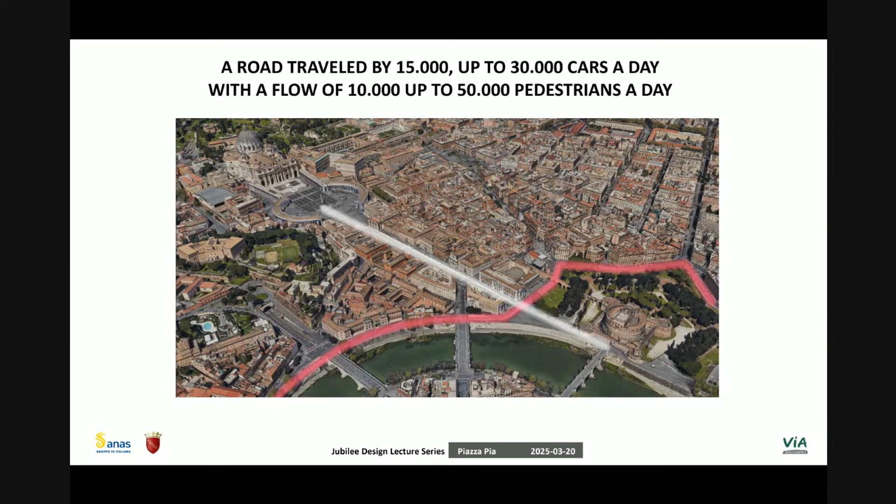But we came with another proposal. The proposal was to cover the tunnel, creating a continuous pedestrian area. Our proposal was enthusiastically adopted by the mayor of Rome and created a completely new perspective.

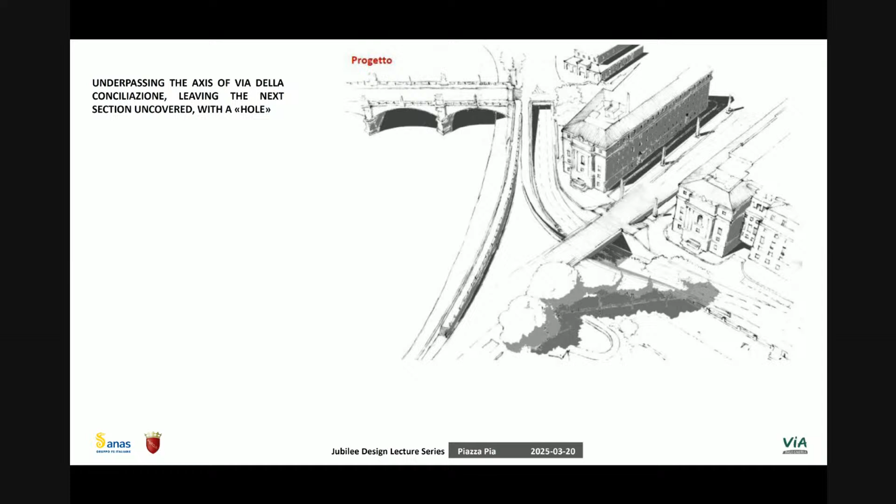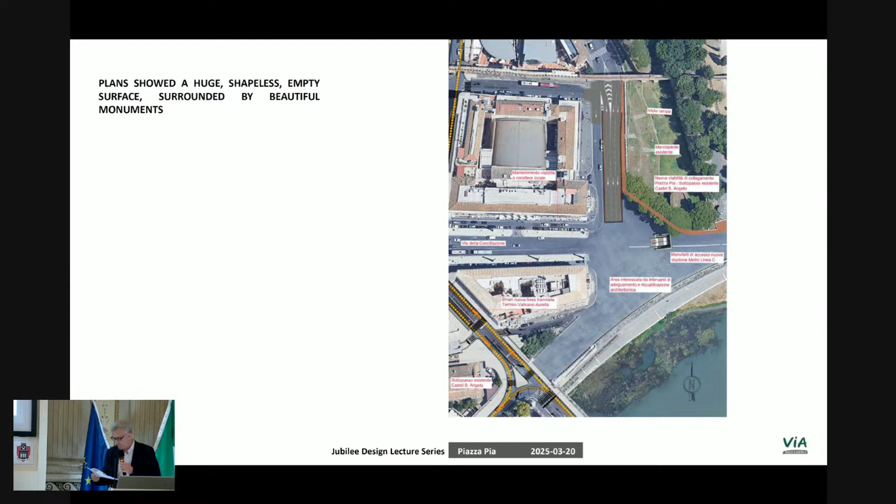We had now a huge, shapeless, empty surface surrounded by beautiful monuments. You can see it in the picture. Around this, we had the Tiber walls, the Emperor's Mole Adriana, renovated in the 14th and 15th century by an architect called Sangallo and transformed into Castel Sant'Angelo.

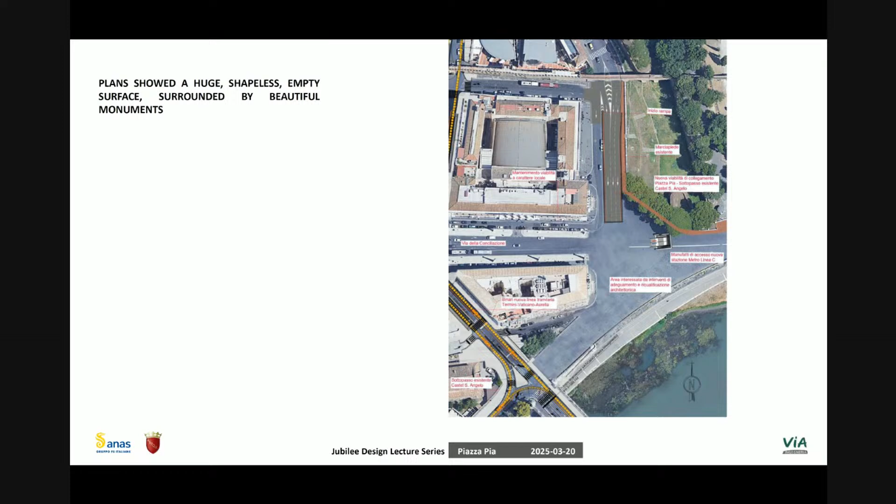This is the Mole Adriana, this one. You can see underneath you have the Mole, and on the upper part you have the castle. And the buildings in front of the square had been built in 1929.

What happened is that no one had faced the issue of how to arrange this huge surface yet. Initially, we were told by the authorities that they were thinking of a separate assignment to design the square — two projects, two teams. We didn't agree. So we made the point that the project should be looked at and considered as a whole from one single perspective, and that we should be the ones to design it in its entirety, by the same team.

Via Ingegneria started 40 years ago with a focus on transportation infrastructure, but just by doing that, we organically developed a strong expertise in architecture. So I go back to my initial point, which is the critical issue in our line of business: the integration of disciplines. We believe that the need for integration is proportional to the complexity of the project.

And particularly this project was probably the most complex we had ever faced. The architectural design, in this case more than in others, was strictly connected with all the other strategical issues: the hydraulic underground issue, the archaeological issue — you may see what we found during construction.

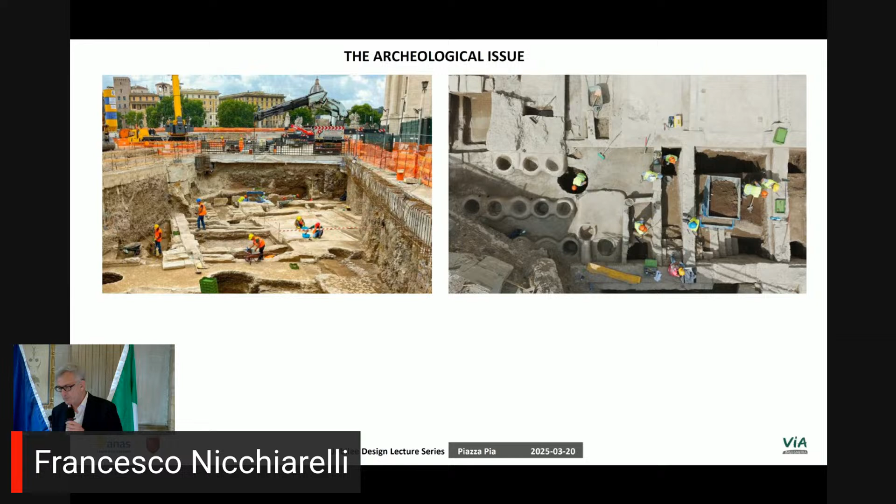One of our partners, who's going to talk to you soon, is an excellent architect, and he has an amazing team of over 20 people in our company. Now Matteo Di Girolamo will tell you the rest of the story from his engineering perspective, followed by Felipe Rozzano, the architect, who will tell you his side of the story — probably the one you want to listen to more.

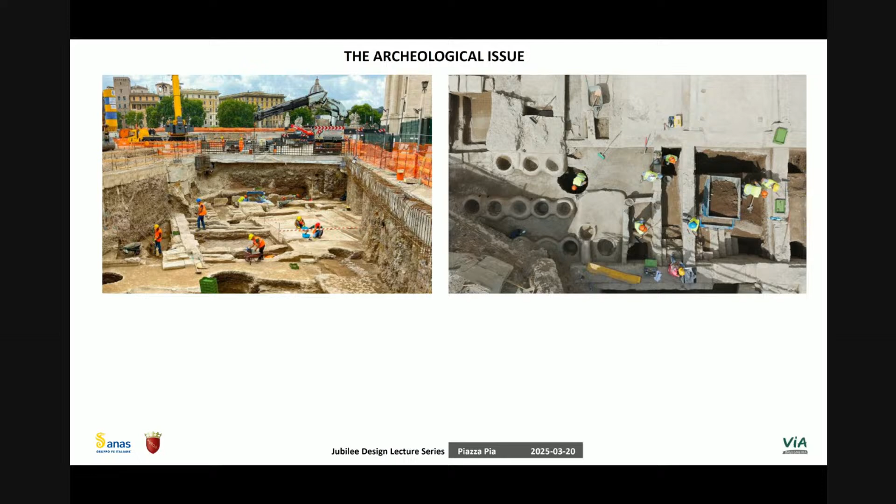Good morning, morning to everybody. I'm going to start the most boring part of the intervention. I'm sorry, because I'm an engineer, and so I think you are not so much interested in this kind of problem, but I think maybe you are.

I think it's important to understand the relation between what you can see and what you cannot see. Just to give you some data, some facts: the cost of all the intervention was about 55 million euros. The cost of what you see, the cost of the square, is about 5 million euros, or something like 7 million euros. Everything else is just down the road, underground.

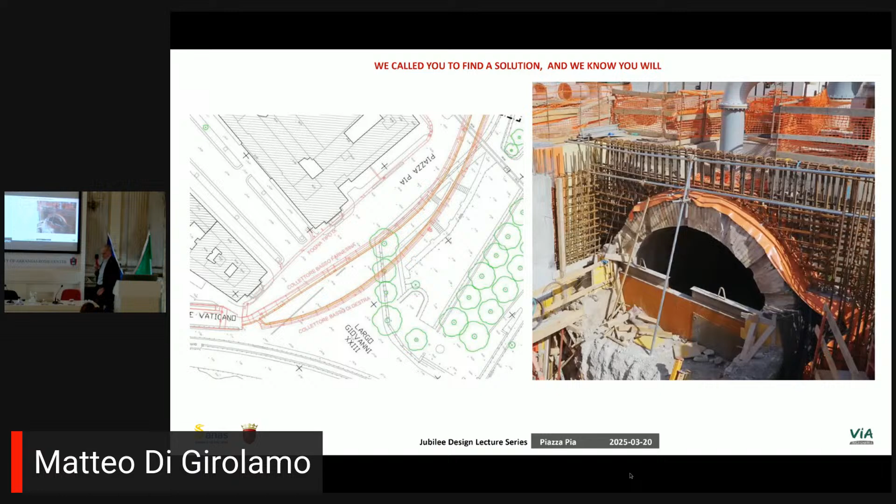So this is just to understand what kind of problem you have to face when you have a project like this. I would like to explain in a few words what kind of problems arose. When I was first invited by the Rome municipality and asked to assess the feasibility of the intervention, I welcomed this request because I still didn't know what I would be facing.

After about 1 or 2 months spent studying the papers on the underground presences, I made a discovery I would never have desired to make. Under the road there were flowing the 2 largest sewer collectors in the city of Rome. These collectors collect all the stormwater of the city, with a catchment area of about 800,000 inhabitants. All the water from the north part of Rome passes through this place, so it's impossible to interrupt the service even for 1 minute.

On the basis of this discovery, I went back to the municipality, quite happy, and said: okay, the project is not feasible. The reason why previously the underpass was stopped before crossing Via della Conciliazione in 1998 was exactly this - the project was not feasible. But the answer from the municipality was: we called you because we think you will find a solution, and you have to find it. No way, you have to find it.

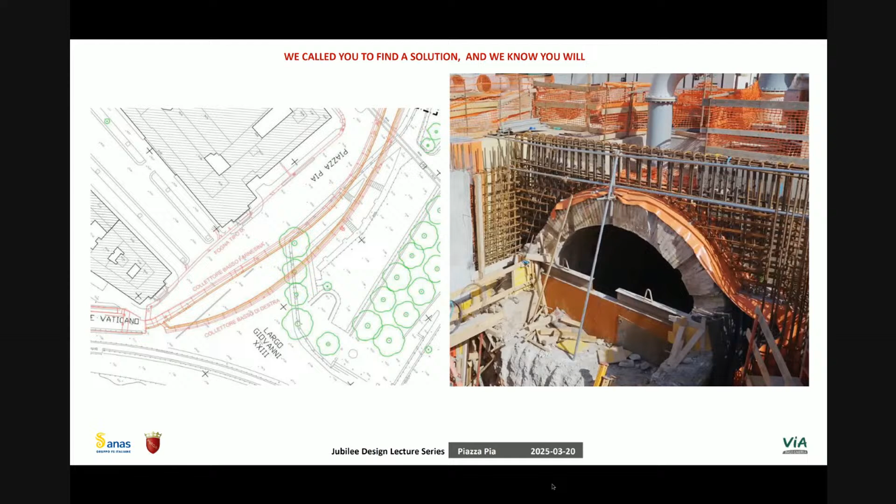So in these cases - and you are all very young, so you will have a very long professional life and face a lot of very difficult situations - sometimes, not often but sometimes, you think: how can I do this? I have to do it, but I don't know how, yet I have to do it. So I kept thinking and thinking, and I started to think of an idea that seemed a little bit insane, but perhaps also the only one possible.

I thought, maybe I don't know why no one thought about this, but anyway I can try. These are the 2 collectors - just to understand the proportions, this is a person. The collector is more or less 4.5 meters high, 3 meters wide. So if I use one of the 2 collectors to carry all the flow, using the second collector, I could demolish one of them at a time and build a third, larger one to collect the flow from both.

The doubt was: will one collector be able to carry the flow rate of both without going into crisis? At this point I started rather complex calculations to see if, during the duration of the construction, this was acceptable, and what risks were involved in making this choice. Of course you understand there is no chance to fail. So the idea could work.

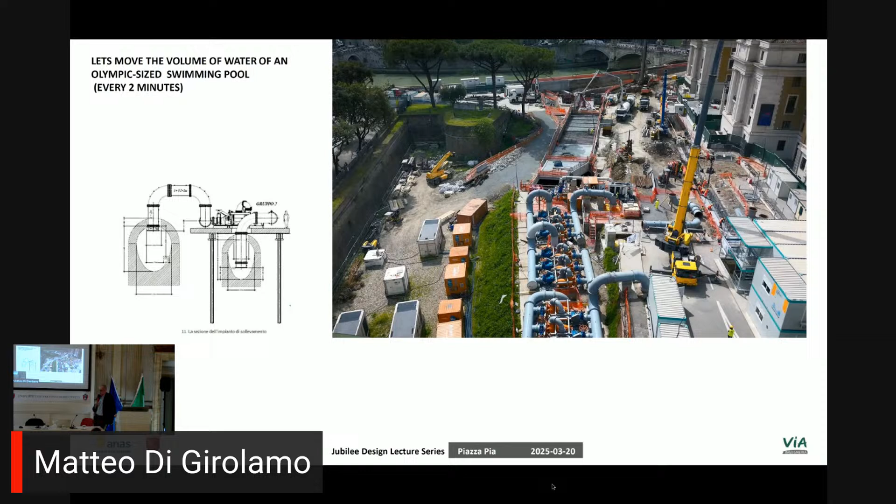The idea was that, at the time, no one was able to assemble such a temporary system, so it was necessary to arrange and deliver pumps from all over Europe. For every pump like this that you see, there were 10 pumps like this, and in Italy there were maybe only 1 or 2 available. So we collected pumps from all over Europe, assembled them together, and delivered them with something like 25 trucks from all parts of Europe, and we started assembling. Here you can see part of the plant, almost assembled.

And then we started to test if it worked, because we thought it would work, but we weren't sure. Once this task was completed, the more complex work was completed too, and we could move to the construction of the underpass and the square.

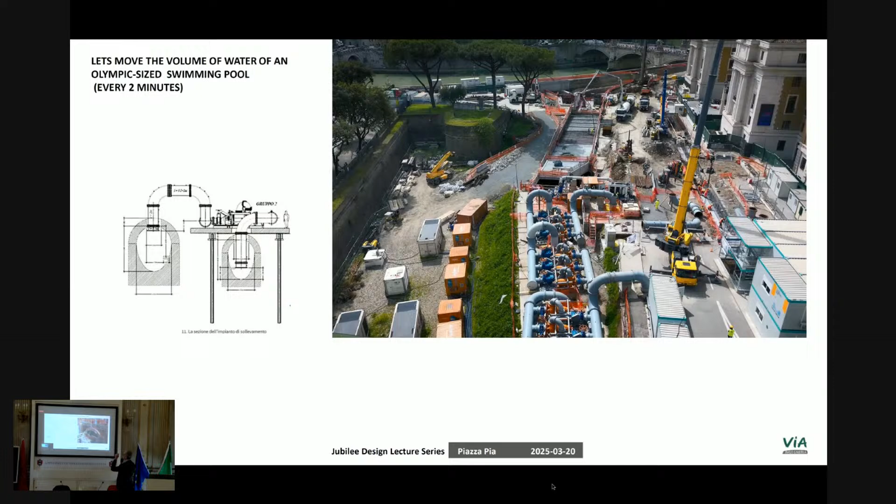Here you can see the new collectors, and you can also understand the size. The new collector is something like 8 meters wide, 5.8 meters. And here is where we are, just aside the wall and just in front of Castel Sant'Angelo.

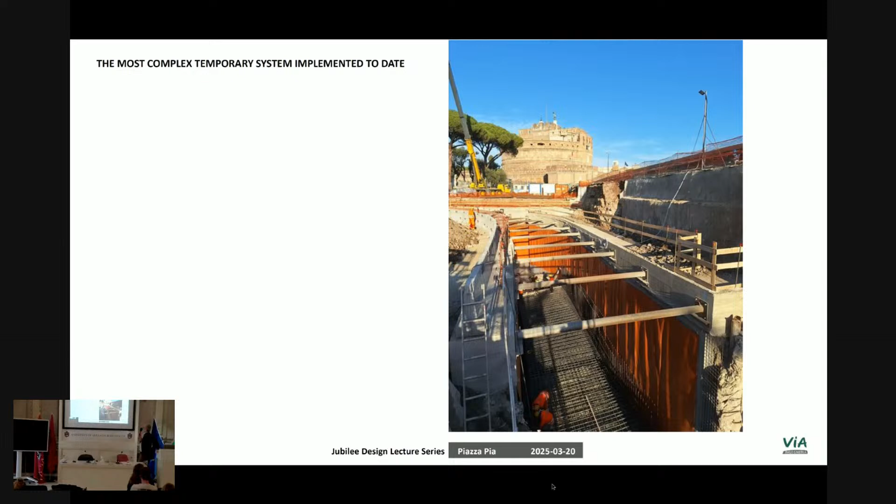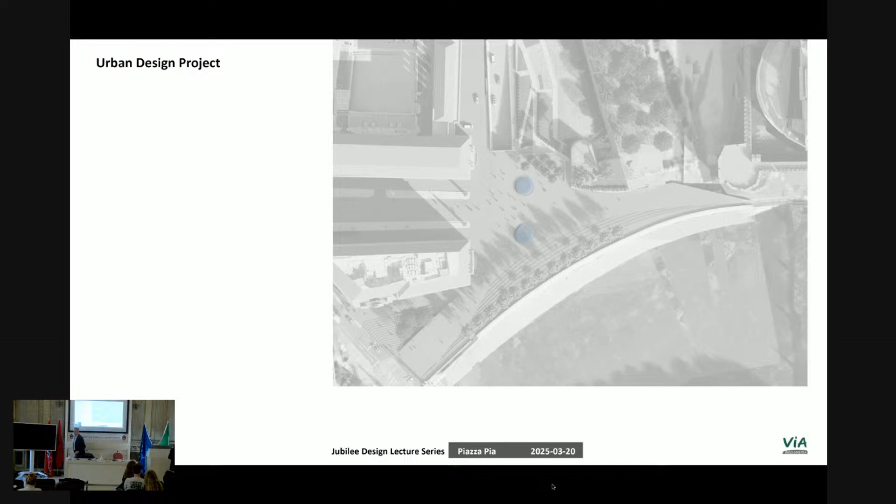Thank you for attending this lecture. Okay. Let me see if I know how this works. Okay.

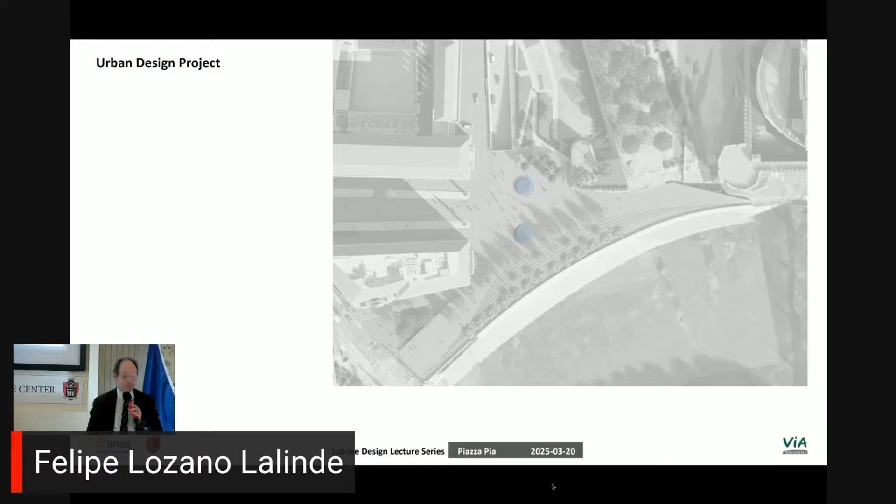Okay, I get it. Again, thank you very much for attending the lecture, and I'm very pleased to share this extraordinary experience we all share. My name is Felipe Lozano. I'm an architect at our engineering and architectural firm. I've worked since the beginning of the 2000s with my colleagues. First of all, I want to apologize for my English, because it's been many years since I've spoken it, so I will try to make my best.

It's important to say that for all of us, working and living in Rome, it has been an extraordinary chance to be involved in this project, and at the same time a great responsibility, because it's needless to say how important the area is historically and architecturally, and also because it's one of the most frequented areas of the city. There is almost no visitor who comes to Rome that does not pass through this area.

So our task was somehow complicated because we had a very short amount of time to deal with the project, since everything happened quite quickly. There was a timeline with a deadline at the end of 2024, because, as you know, on the 24th of December 2024 the Jubilee year began, and by that date everything had to be completed. So that was quite a challenge.

I would also like, as a kind of premise, to underline the importance of having worked in a multidisciplinary team. I really believe that, at least for me as an architect, working with my colleagues - engineers, structural, hydraulic, and so forth - was an opportunity to face the different issues during the design stage in order to find solutions in a more integrated way. This is the kind of approach we try to implement in all our designs.

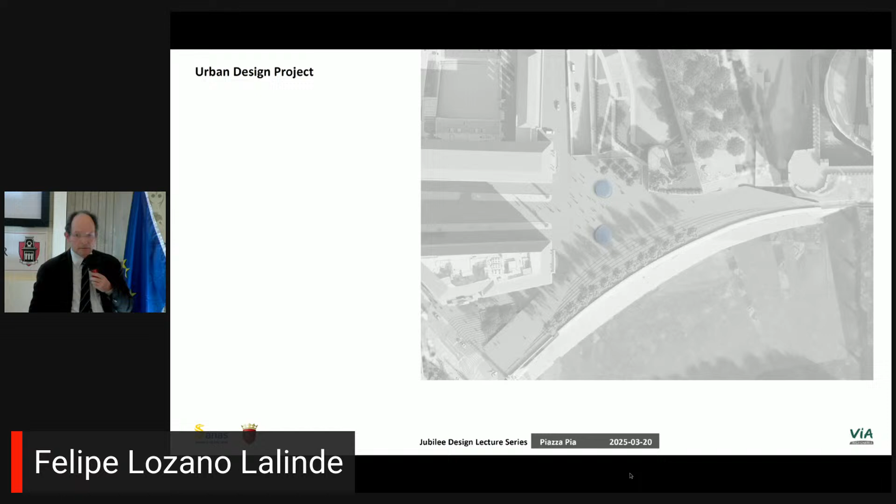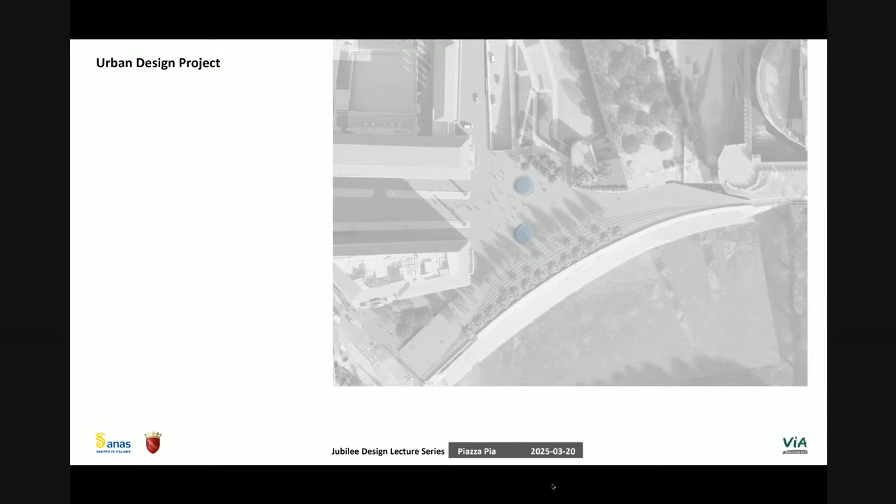After this introduction, I'm going to talk about the urban design issues. It's necessary, in my opinion, to give some idea about the urban development - how the city has grown, and the changes this part of the city has undergone over the centuries. Independently from our project, I think the changes this part of the city has suffered is a very interesting theme to study. I'll try to give you some idea, but shortly, because it's late.

This is how the square, Piazza Pia, was presenting previously to the new project. You can see the entrance to the tunnel that was built in the late 90s, and the two buildings at the beginning of Via della Conciliazione that, as I will explain later, were built in the 50s - so actually relatively modern buildings compared with Hadrian's Mausoleum, which is here in the bottom part of the picture. And you see the traffic junction.

Another interesting element, as I will explain later, is the retaining wall you can see there, creating a cut between the surface of the square and the river, and the sidewalk that runs close to the river wall. But we will talk about that later.

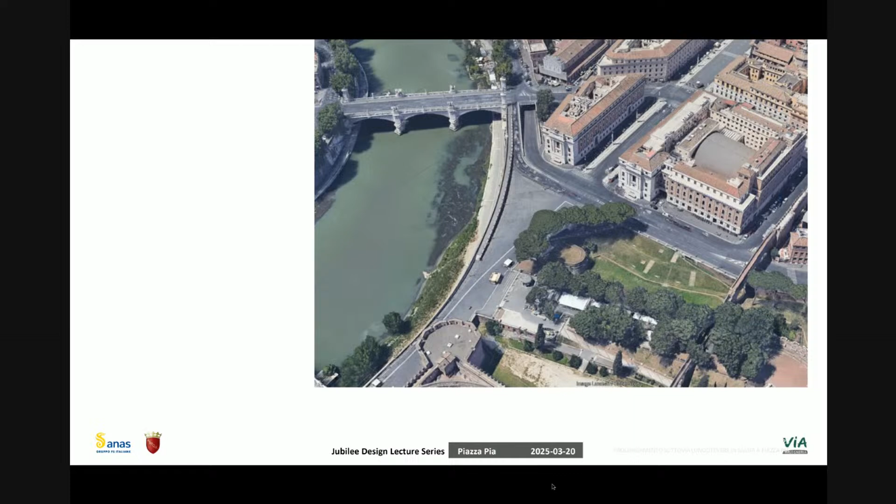It has been represented later, but there is a very beautiful ancient Rome map called Forma Urbis that you can see. It's in the Celio, but it does not reach this part, so it's hypothetical how the city was in Roman times.

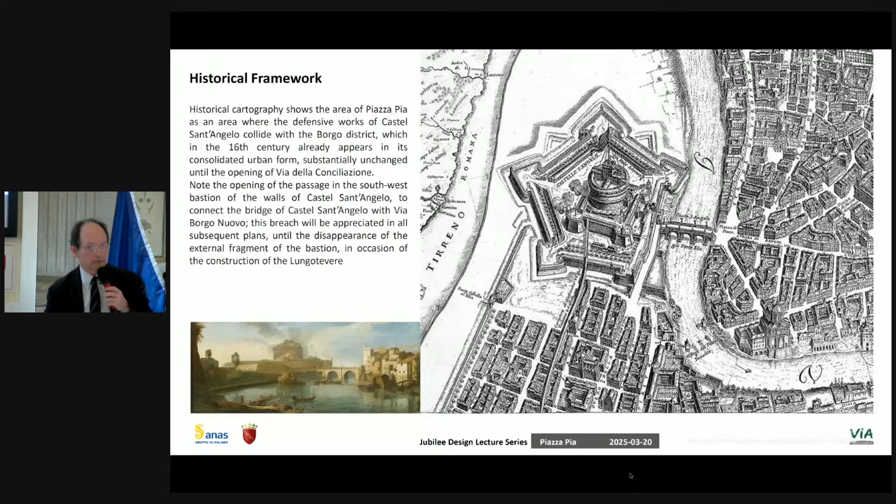Instead, since the 16th century, many designers and architects have portrayed the city, so we can see how this area was at that time. What we can say is that part of the area had an urban fabric that was consolidated since the 16th and 17th century.

And there was a very important plot in this part, which is the pilgrims' pathway. As you know, there is a sign here. This is Ponte Sant'Angelo Bridge, that links this part.

It was the bridge that, since the first Jubilee year at the beginning of the 14th century, when it was first held in Rome by Pope Boniface VIII, was used for pilgrims to cross the river, then turning west, going to St. Peter's Basilica. This is a very historical, consolidated pathway that has remained almost unchanged until the end of the 19th century.

One of the main aims from the urban design point of view was to reestablish that urban hierarchy that has been somehow compromised during the 20th century, mainly because of the increasing pressure of road traffic.

So here, there are two elements that I think are fundamental in order to understand our job: the urban fabric on one hand, and the Tiber River on the other hand. This is why I have inserted this image.

This is a very beautiful picture by Gaspar van Wittel, who was a painter in the late 17th century and early 18th century. He has made many views of Rome, which are extremely useful for us who work in the city of Rome, in order to understand how it was centuries ago.

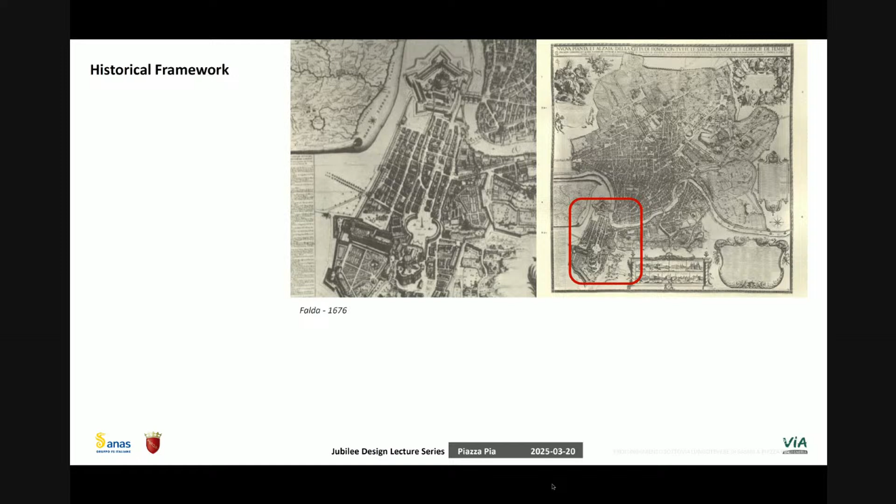It conditioned the bastions of Castel Sant'Angelo that were built earlier in the 16th century. As you see, this five-point star of the second line of bastions, this particular one was cut in order to allow pilgrims to move from the bridge towards St. Peter.

This is another view, quite interesting in my opinion, in which you can see from east towards west and towards St. Peter, how the area was. We are not talking about the central part of the area; this area actually was in the fringe.

Behind Castel Sant'Angelo, there were fields. It was not built up; it was built just at the end of the 19th century, to give you an idea.

Here you can see, as I was saying, the main path was through this road, called Via di Borgo Nuovo. From there were two other roads, Via di Borgo Vecchio and Via di Borgo di Santo Spirito. It's interesting to see these roads, because they no longer exist, as maybe you already know if you have walked around the area or read something, because they were completely knocked down at the beginning of the 20th century.

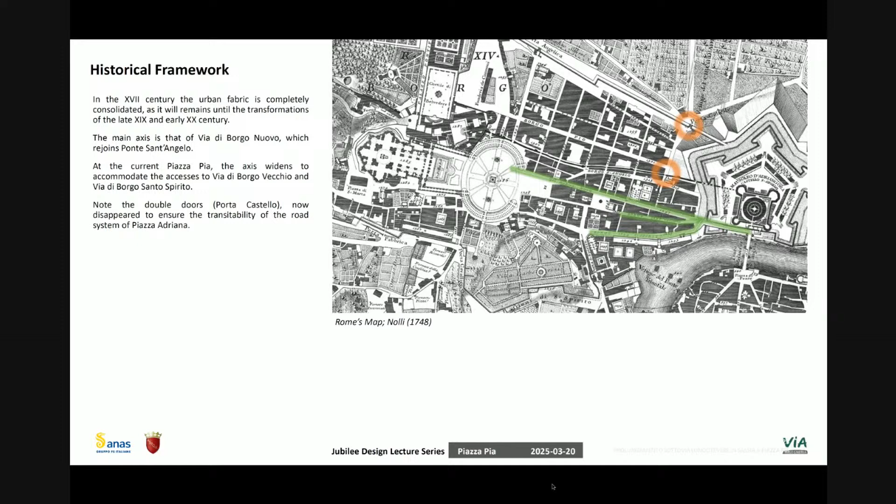So everything was more or less consolidated until the turn of the century, between the 19th and 20th century, when dramatic changes happened in Rome as it became capital city of the Italian state. You know that until 1870, Rome remained under the rule of the church, nevertheless the Italian state had already been established in 1861.

Rome remained under the rule of the church until 1870, when it was taken by Italian troops and became the capital city. So major urban refurbishment works were undertaken in order to modernize the city, which until that time had remained almost an anti-modern city, one of the few in Europe that had remained so.

Take into account that Rome, being a big city, is one of the few capital cities that still have the defensive walls that in the meantime in other cities such as Vienna or Paris had been completely knocked down in order to enlarge the city. But that was not the political program of the church ruling the city.

This changed after 1870. Major works were conveyed. One of them had to do with changing the shape of the river, also for sanitary and hydraulical reasons. The Tiber was quite a changing-in-level river, so it produced many floods in the city center. So major works of creating retaining walls were done.

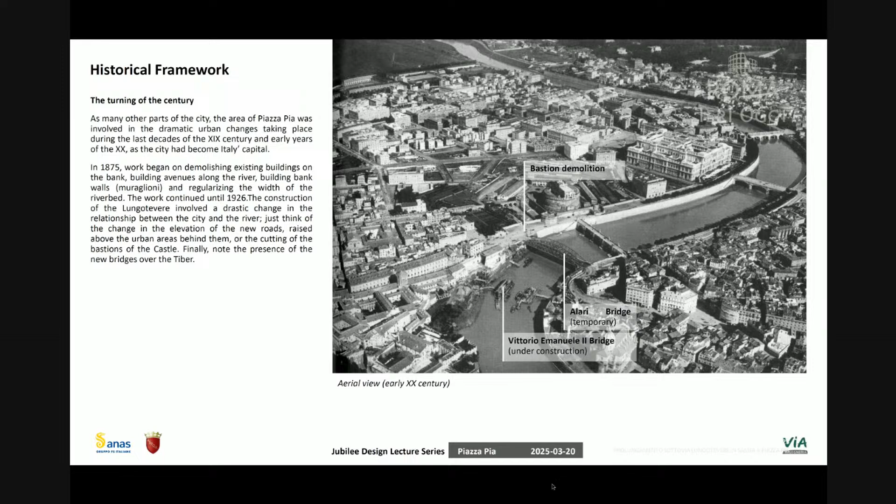For example, part of the bastions of Castel Sant'Angelo were knocked down. Just to give you an idea of the situation, how the place in which we are called to work has suffered many changes in the course of centuries, and in our opinion it is fundamental to acknowledge that progressive change.

This is, for example, a couple of images of the works of the new walls of the River Tevere that were built since 1875. It was one of the first works carried out in Rome as capital city. They are important because from an engineering point of view, we have had some interferences with these walls, as my colleagues engineers know.

This is interesting as well because these are images of the 20s. As you can see, other transformations that were even funny, from a certain point of view. These are the moat of the external defensive walls of Castel Sant'Angelo.

If you see the two images, which one would you think is the older one, the one on the left or the one on the right? In the left you don't see the moat, in the right you see it. Curiously, the older one is this one, because at a certain point the moat had been filled in. There was no need for that element.

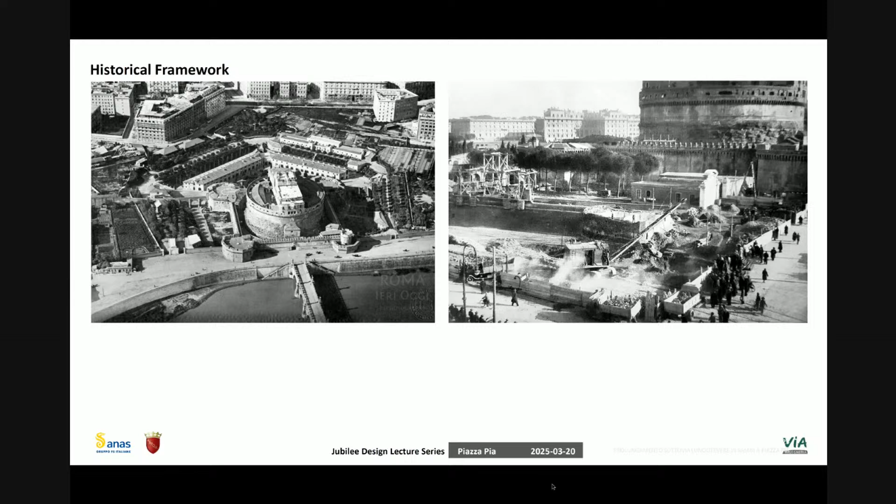It's important to say that the architect in charge of this design was Attilio Spaccarelli, one of the two architects that later had to do with one of the major interventions, the major project that is fundamental to understand how the area looks today. This is Via della Conciliazione.

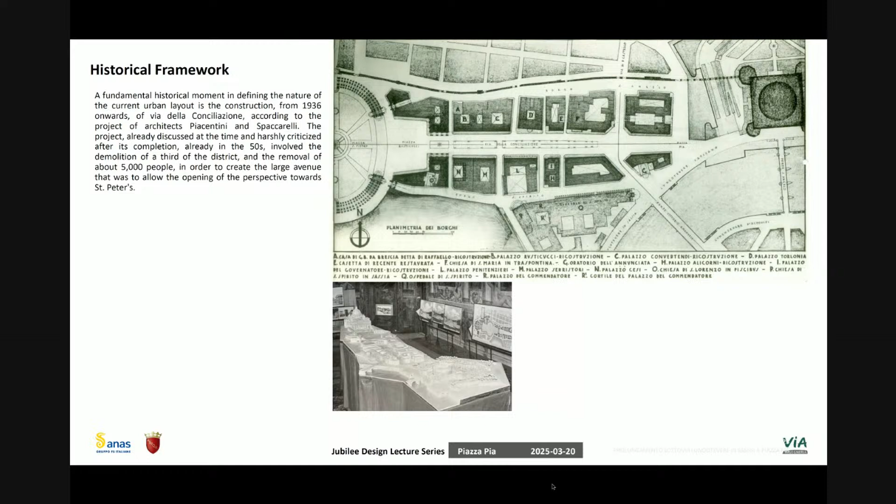Via della Conciliazione is an extremely interesting project in my point of view. It's as interesting as it has been criticized. It's hard to say whether it's a good or bad urban project. Maybe on the other hand, it's useless to give an opinion.

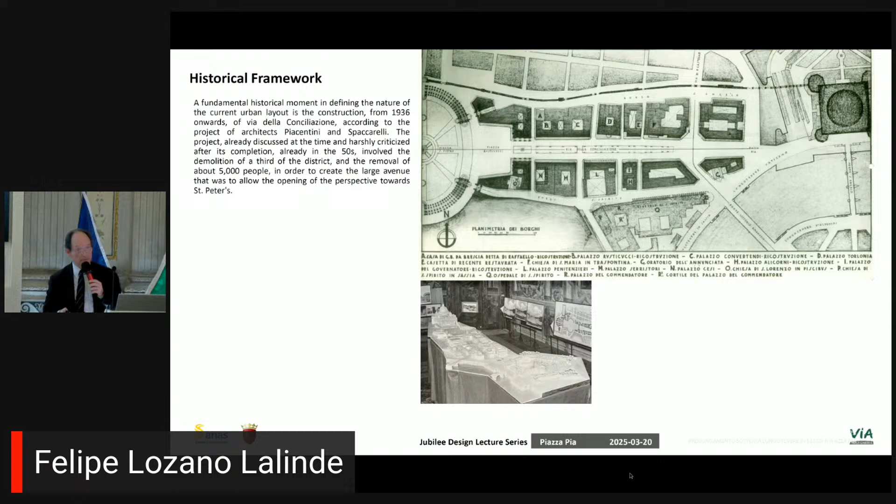This project was approved by Mussolini, designed by architects Spaccarelli and Piacentini. Marcello Piacentini, if you do not know him, was one of the most important architects of fascism, of the fascist era. He has built dozens of buildings throughout all Italy.

In this case, he made this intervention, taking into account that in order to create this new avenue, Via della Conciliazione — the Conciliation Avenue, maybe — the name is not casual. It tends to underline the agreement between the Italian state and the church signed in 1929. Until that time, after 1870, the relationship between the church and the Italian state had not been so great, as you can imagine. This changed in 1929, and this road had somehow to celebrate this new agreement.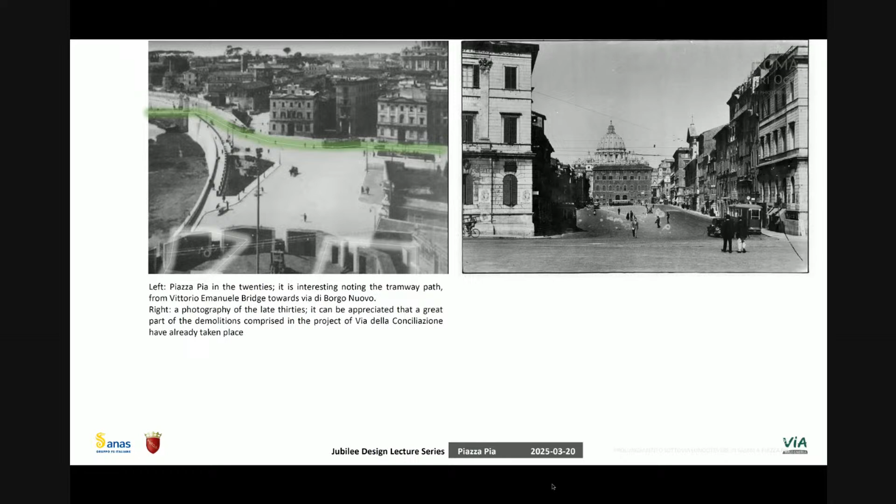So, well, I've made this historical background, which maybe became broader than I wanted, but I think it was useful. Now let's talk about the project. For sure, the project had a main aim, which was to pedestrianize the central area, eliminating the traffic junction, in order to foster the pedestrian flow towards St. Peter's.

But on the other hand, since the first moment, we thought that just pedestrianizing the area through the extension of the existing road gallery was not enough to obtain an urban space with enough quality. So we made an analysis of what other deficiencies the area presented to this date.

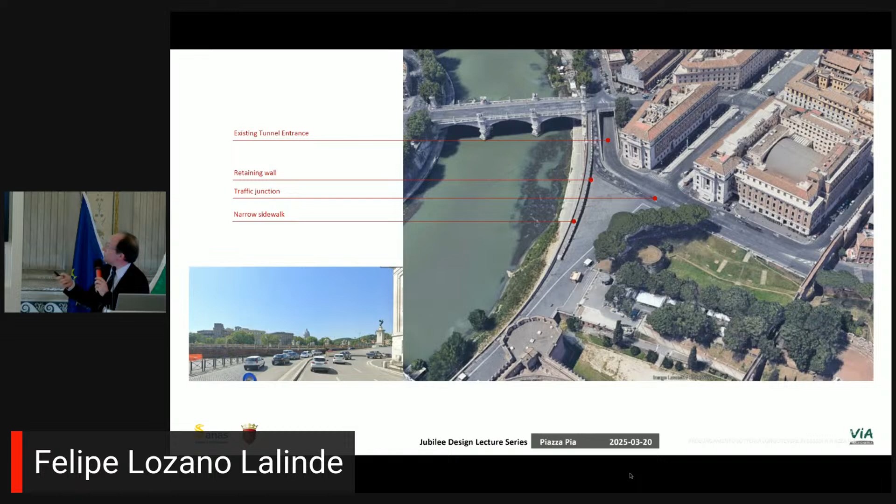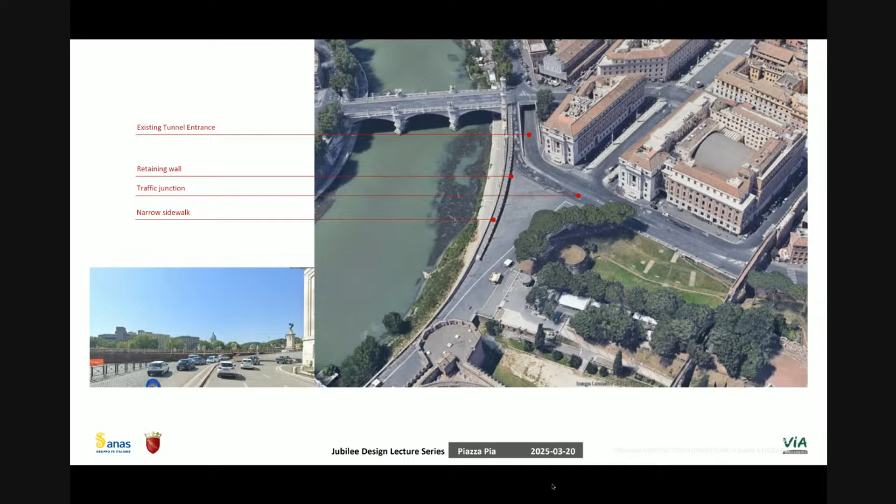For example, a thing we thought could be improved was the relationship between the area and the river. This relationship was almost neglected in the previous state. As you can see in this picture, there was a retaining wall that separated the sidewalk close to the Tiber wall from the rest of the square. So once you were descending from Castel Sant'Angelo to the central area, the river tended to fade, and you were not able to reach it again—there were two completely separated entities.

So we thought that had to be improved, and that became maybe one of the main elements in defining the urban design project. Of course, another element that could be rejoined was the piazza, the central core of the square, with the gardens in the old moat of Sant'Angelo. In this case too, staying here, you were not able to go to this green area. So this area was almost abandoned, which was a pity, because it's quite interesting. We thought this relationship had to be strengthened.

Finally, there was this area that had to be completely rethought, because it was previously occupied by the entrance of the old gallery. So there was a new surface that had to be designed. It cannot be seen in this picture, but I'll show you later—there is a small church, quite interesting, even if it's a fake, in the sense that it's an 18th century church, extremely interesting, but not placed in its original location. Actually, the church had been demolished and rebuilt during the works of Via della Conciliazione, because at that time they had no problem doing this kind of thing—they talk about moving palaces. Of course, they were not moving anything.

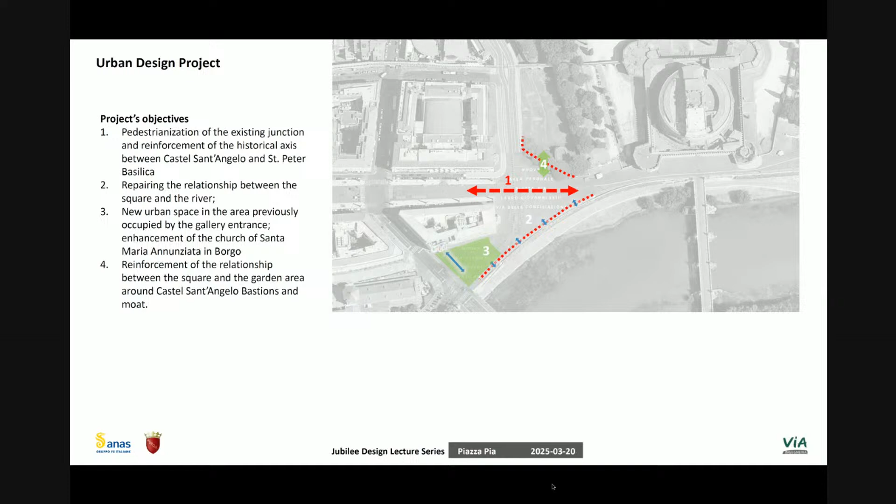This object—so we focus on how to achieve these objectives. Here you can see an image of the preliminary design that shows how we try to accomplish those objectives.

In the case of the relationship with the river, we thought that the retaining wall had to be completely rethought. And we substitute the wall with a gentle slope built as a series of steps in a very typical Roman tradition.

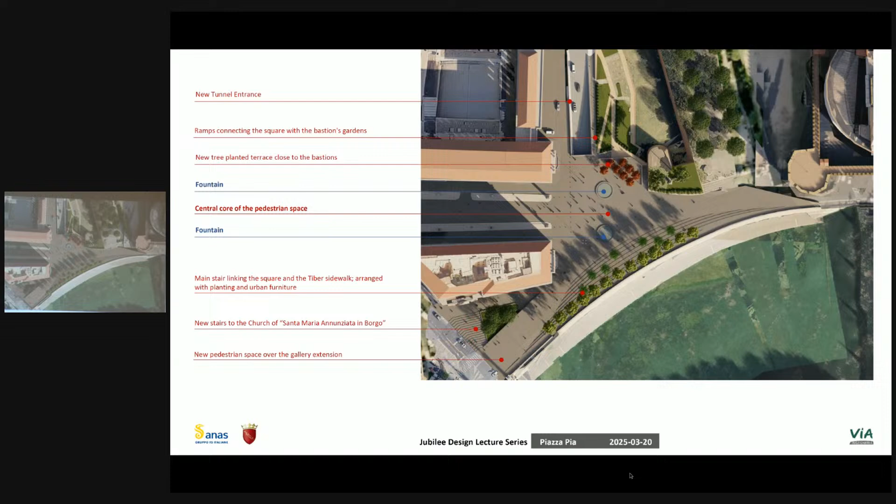Let me make a parenthesis here. From the very first beginning, we put ourselves the problem of which was the architectural character we wanted to give to the project, because this is quite a delicate area in which you are under the eyes of many people, many authorities.

And so, okay, again, how to deal with the forms? I have to say that we decided to work in a very silent way, if I can speak this way. I mean, not in order to create a new element that on itself represents a novel sense of novelty, but we were more interested in reinforcing the relationships between the elements that already existed in the area.

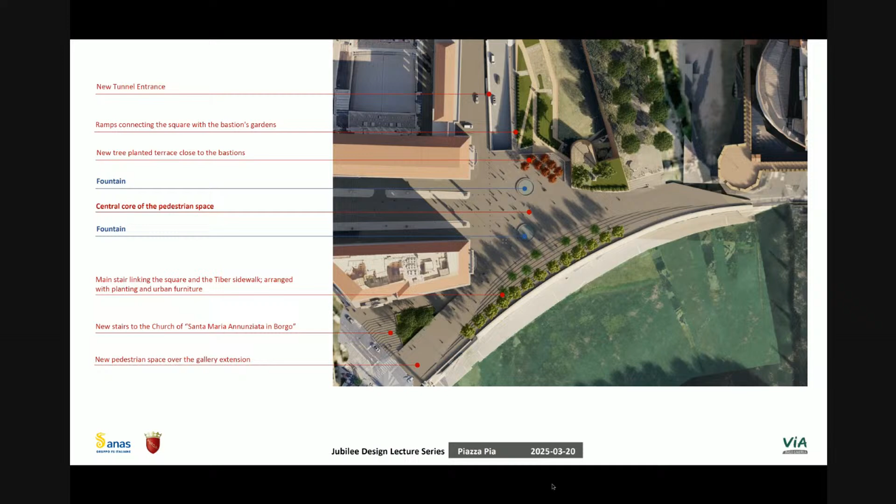The river, the mausoleum, Hadrian's mausoleum, St. Peter at the end, and the church I was talking to you before. So in this case, we try to work with very typical Roman elements.

Such as, for example, these gently sloped steps that you can see in places such as Campidoglio or in the surroundings of Piazza di Spagna, just in order to give you the idea of which were the realities with which we were measuring ourselves.

This is an image of the 3D model we made. We built a model, a 3D model that was quite fun, that went from Castel Sant'Angelo to St. Peter. And we extracted the designs, the drawings, from that model.

And this, of course, this is not in perspective. This is a section, a cross section in orthogonal view.

So the first time we saw this image, we thought that we had made a mistake, that it was not possible, that there was something wrong because it was too big. And you know, in normal day life, you don't see it this way, because the perspective effect tends to decrease the size of St. Peter.

But if you see it in real dimension, the relationship between masses is exactly this. We later made some measures in order to verify if our model was correct, and in fact, it was correct.

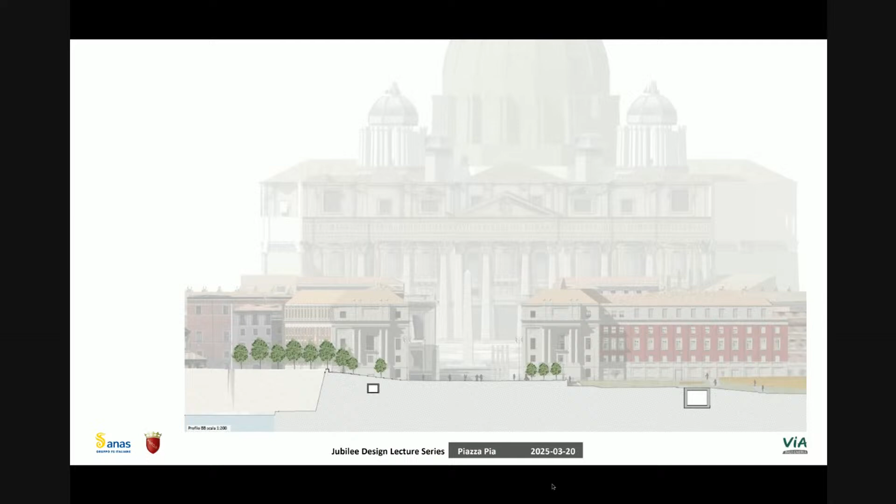So this gives you the idea of what we're talking about, and which are the masses with which we have to work. This is just in order to emphasize the silence we wanted to achieve. It was not the point of creating the risk of making something completely out of point—too big, in my opinion.

Of course, on the other hand, the project has been criticized by someone for not being so courageous from the urban form point of view. I think it's okay, I mean, I assume that critique.

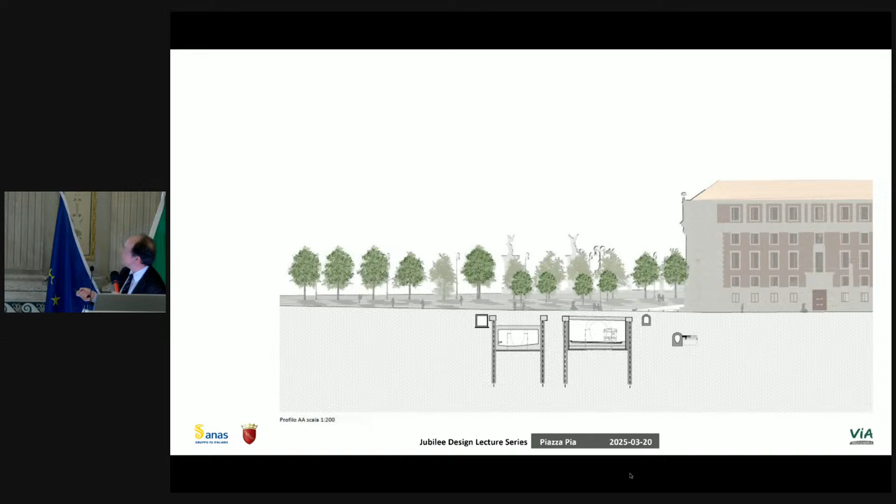And here you can see some other pictures that we extracted from our model. The model was really interesting—I don't want to focus that much on this, but it was a model that had either the urban design, the surface project, and also the underground structures, which were fundamental because we have to deal with conciliating both of them. I will show you some other images later.

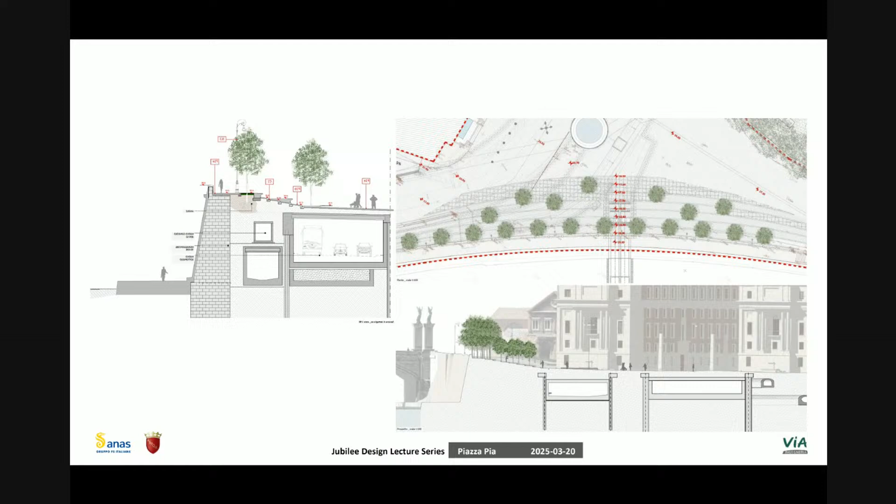For example, this one. So this is an image showing that element I was mentioning, this curve. Of course, the geometry of the stairs assumes the line, the curved line of the Tiber, and then just by offsetting this line it creates these stairs that become bigger at the center part of the square, because that's where the square reaches its lower level. And then it goes up to one side and to the other.

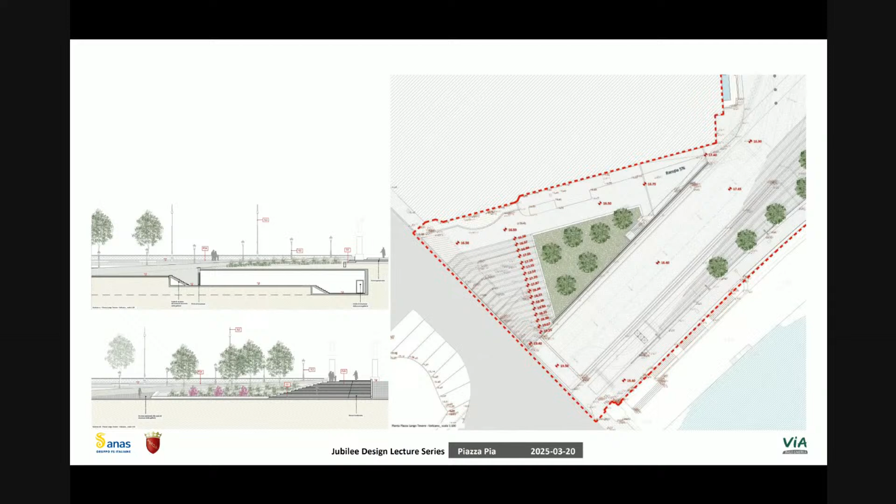In a similar way, we try to enhance the relationship between the new pedestrian area and the church, as I was telling you before, creating a new stair in order to give bigger visibility to the facade of the church. I will show you some renders later on.

And then finally, we tried to work on reestablishing or improving the relationship between the square and the gardens, which are defined by some pedestrian paths. This area, I think, will be finished in a few weeks, but it has suffered different changes mostly because of technical spaces that have been built underneath the soil level, which have caused the area to change a bit from this design.

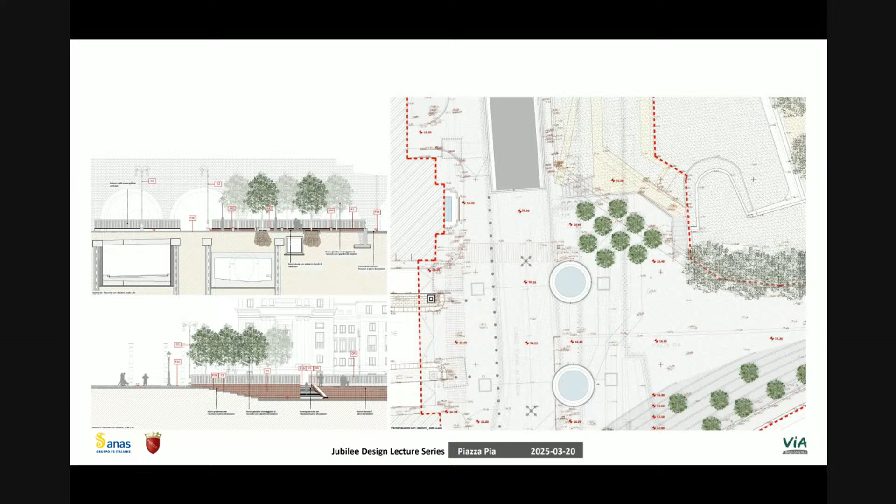As I was saying, this is just a couple of images of the details. We try to do everything in the most discreet way, using typical elements of the city of Rome. Rome is a city in which you have to work with a certain care, in which everybody states his own opinion, and at first novelties are not particularly well received, let's put it that way.

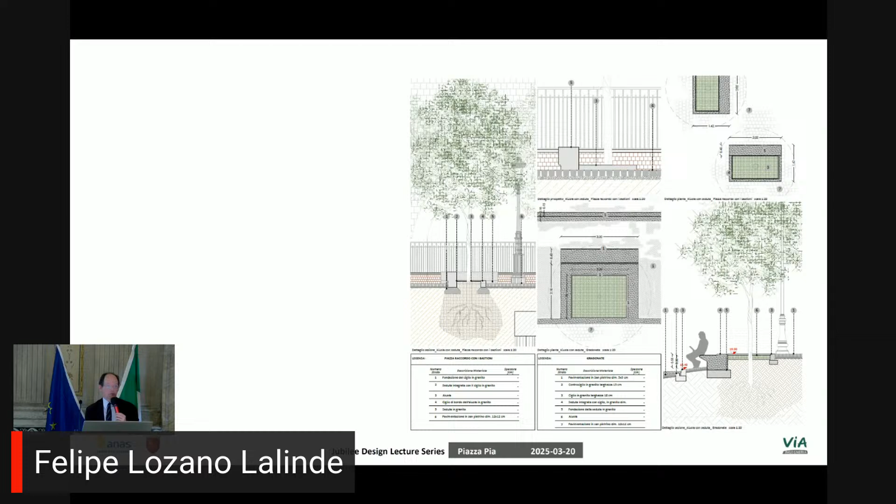So again, we used volcanic stone, which is very typical of the center of Rome, that black stone you can see almost everywhere in Rome. The urban furniture, curbs, and so forth were made in travertine marble, which is also very typical of the city. We had quite a few discussions about this because we actually wanted to use granite, which is also quite typical of Rome. But in the end, talking with the Soprintendenza — I can't translate this, let's say it's the authority that deals with cultural heritage — they imposed travertine.

And then we arrive at the images of the square. Actually, in these renders, there is still the granite.

One last thing I could talk about is the fountains, which is one of the funniest parts of the project, in my opinion. I don't think they are the real core of the project — for example, the steps that connect the square and the river are a much more important element from an urban point of view. But nevertheless, the element discussed the most during the design phase was the fountains, because, to be honest, the request for the fountains came from the mayor of Rome himself. He was particularly worried, and we shared that concern, about the livability of the square, which is a much more important argument today than it was maybe 30 years ago when I was studying architecture in Spain.

At the time it was quite typical to build so-called hard urban spaces. Nowadays it's almost impossible. In the first renders we made of this square, criticism immediately arose that there were not enough trees. The question of planting and naturalizing urban places has become fundamental. But in this case it was hard to operate as you could in other places, even in central ones — for example, in my city, Madrid, a new big square has been made in the city center, all full of trees, and also in Barcelona or Paris. But I don't think there was a question of working that way here.

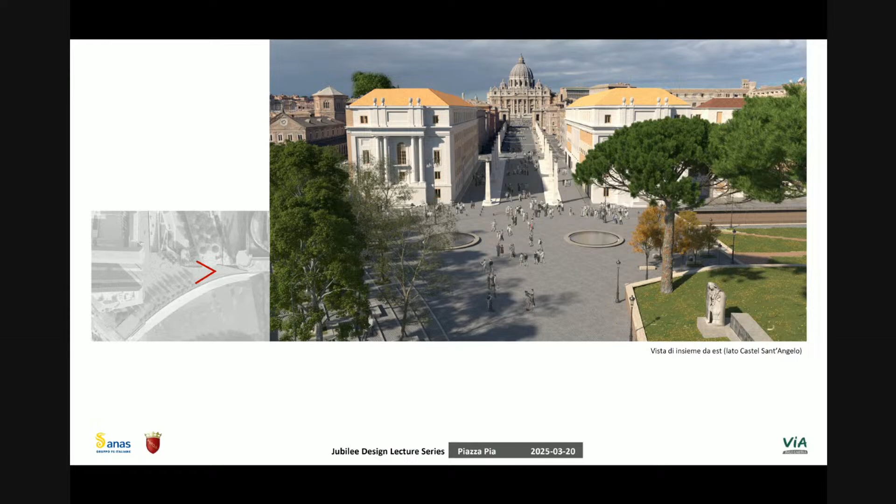Everybody was quite worried about what is called the heat island — I don't know if that's how it's said in English — but it has become a major issue in designing public spaces because of increasing temperatures and so forth. So we tried to deal both with the question of how to create livable spaces and at the same time preserve views and maintain the integrity of the existing views and monuments, not only St. Peter's, but also the couple of buildings at the beginning of the Via della Conciliazione.

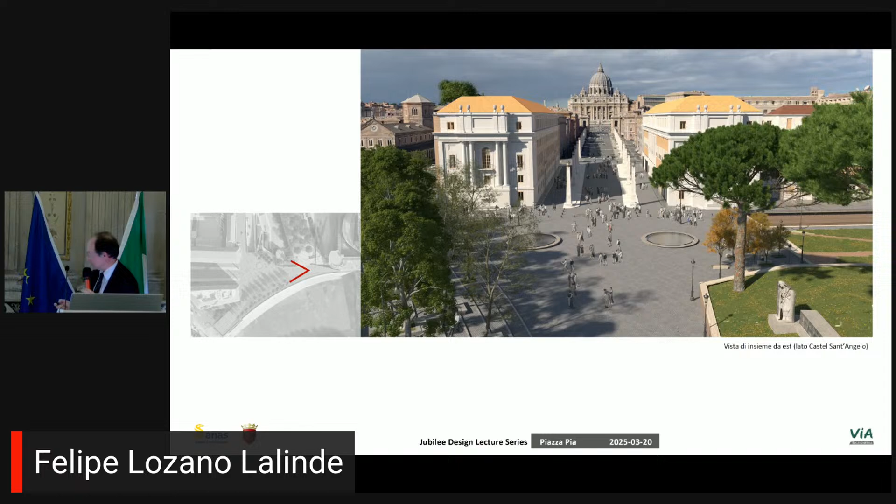So when we were first asked to make a fountain, we placed it in the middle of the square. We thought that was quite typical because, geometrically, the shape and perimeter of the square are quite undefined, so it was necessary to work with very clear geometries in order to establish a hierarchy. But then the Vatican representatives were completely against the idea of a fountain in the middle, because they were afraid it could have a negative impact on the flow of pedestrians from the bridge to St. Peter's. So we made different attempts to reconcile these issues.

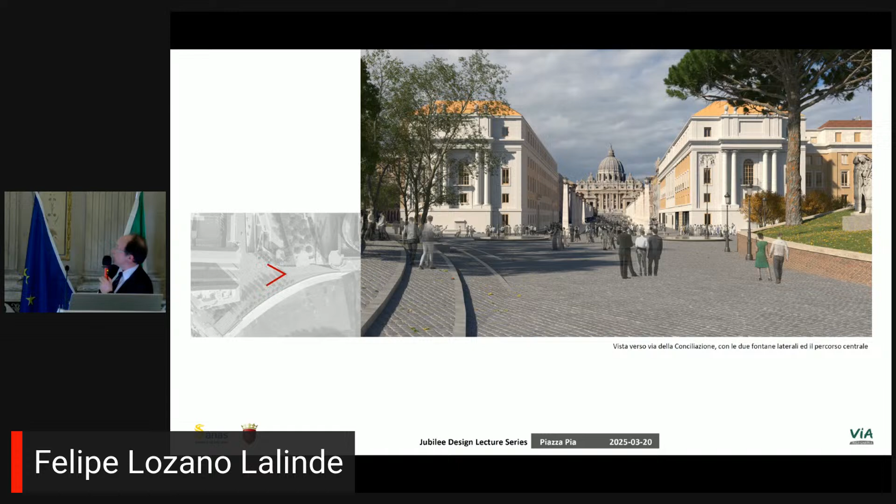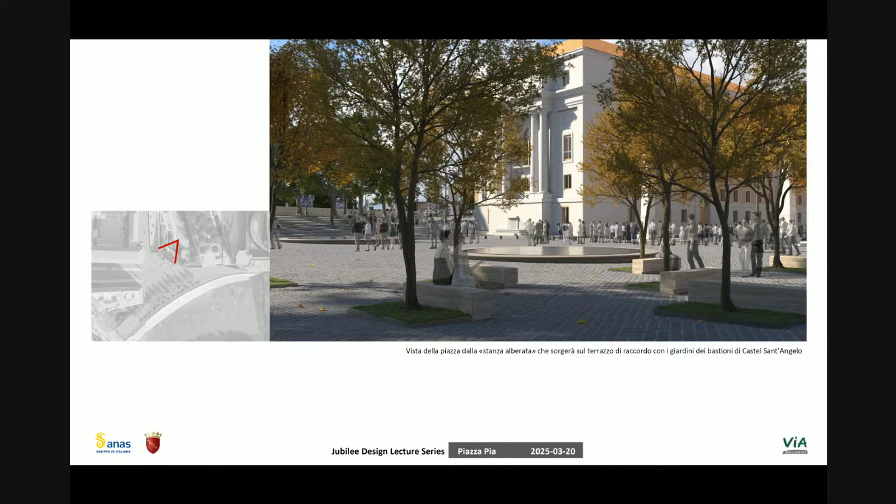And at the end, we finished defining these two fountains that you see here. So I give you some images of the design stage renders that were used to illustrate the project and that obtain the nulla osta from different subjects.

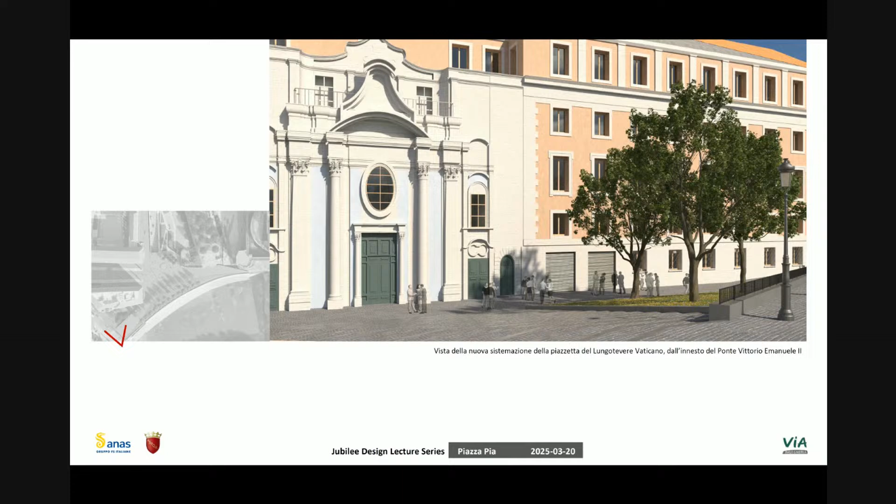This is the church I was talking to you before, and the new stairs create a new relationship. Take into account that before the project, this church was almost completely hidden because of some trees that were here. And I think I have finished.

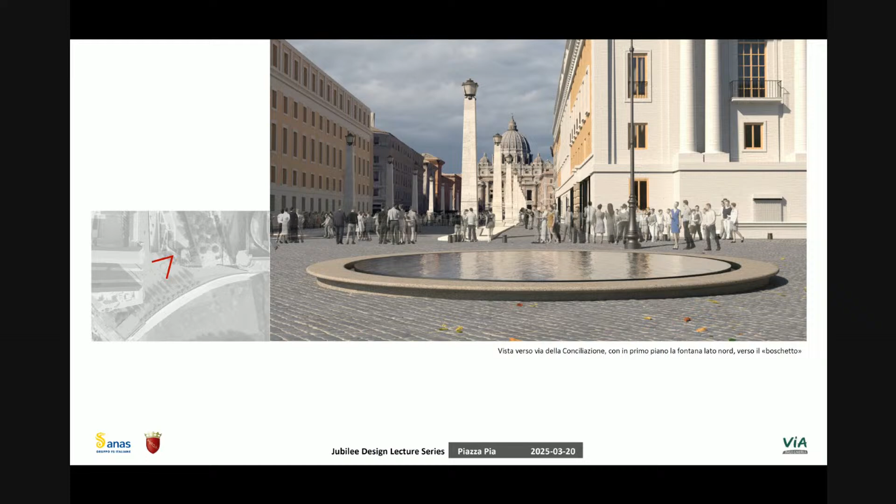All right, it works? Fabio, does it work? Fabio? Microfono? No, ecco, yes. Oh, great.

It was a very, very interesting lecture. Thanks everybody, it was really, from my point of view, really amazing. Also this last part about the historical development and the reason why you came up to the design solutions was very interesting, and this is actually how our students operate. Many studios are dealing with public space design. We observed the city the way you were describing, so it was really, really good.

Okay guys, so now it is a moment in which we usually spend a little bit of time debating about the lecture you just heard. I collected a number of the questions that you guys submitted to the online form, and I will now read those questions. Sorry, I need my glasses, otherwise I cannot see. While waiting for the questions, I have a question myself, and the question is all about: while digging so much below the ground, did you find any other archaeological remains?

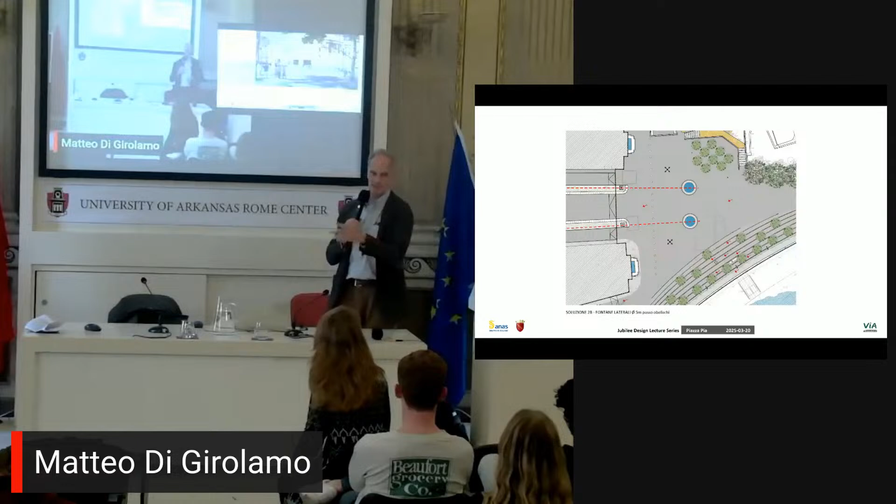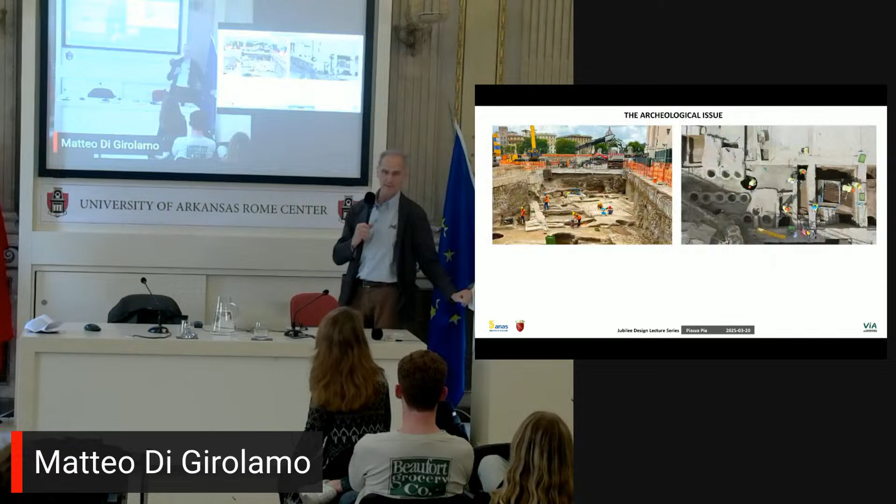And we are planning to remove it here, just aside, to find a place. This is a target of the new project there in the gardens. There should be an area where all the remains are placed again.

Yes, actually I was very curious about this. È una tintoria. I was actually, yes, to wash the... Yeah, I recognized the structures. I just didn't want to interrupt the lecture. And actually, there was really a question by a student about how you dealt with the archaeological remains that you found.

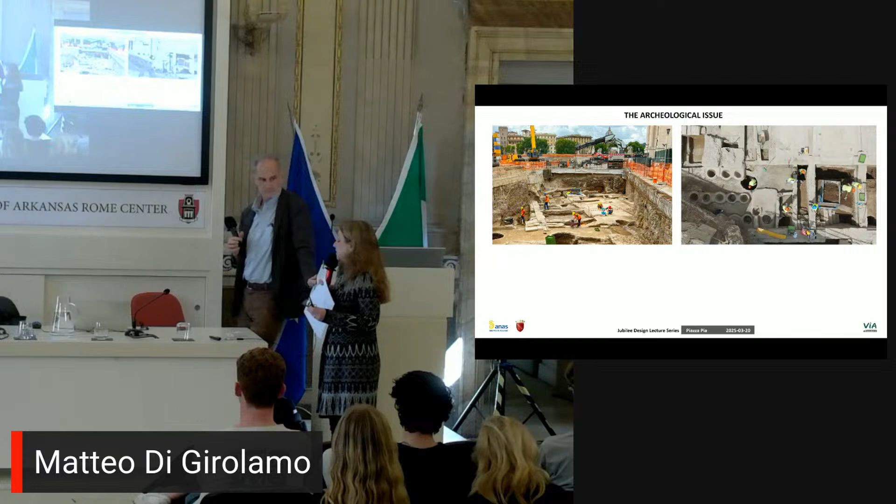Yeah, I also have another question for you. I know that the river embankments are pretty fragile and the soil is not really the best ever. I'm just asking if you had to do some things with the river embankments, or if you just didn't touch them. No, we made a lot, yes, we have a lot of problems with this.

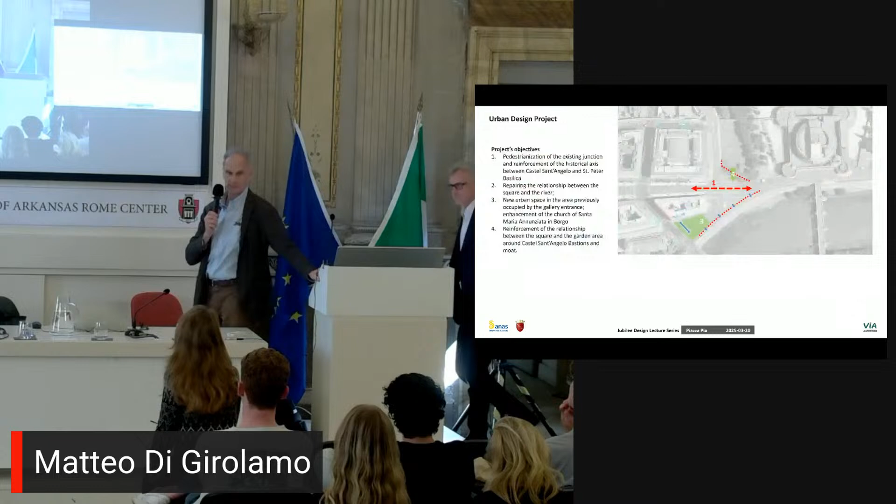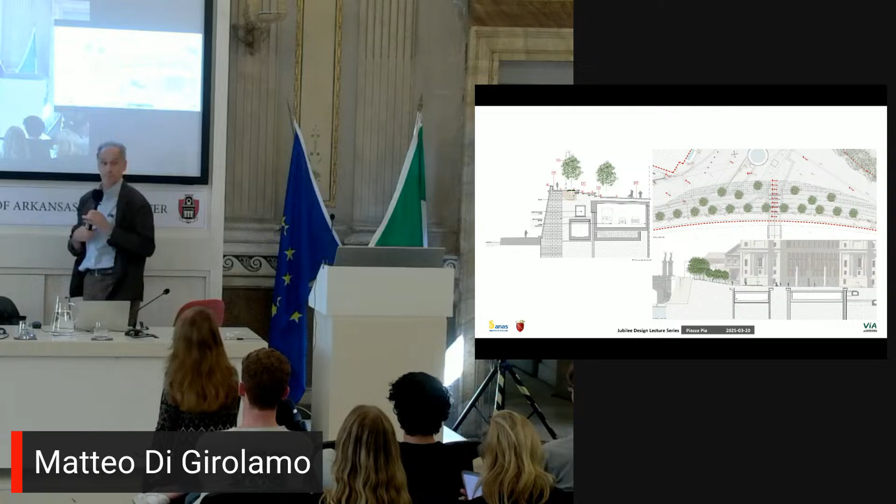I mean, the river embankments, we made a lot of analysis about this to check if it was possible to ensure the stability at any moment during the excavations. And everybody, here you can see how close the new collector is to the buildings. And so there was a very important historical analysis about the structures, like this, you see here.

But, so we made drills to check the quality of the wall and so on. And after that, we also did quite important analysis, also numerical analysis, 3D analysis, and so on, just to understand if it was possible to excavate like this. And so the results were okay, but it was not easy. That's why the cost of the project is mostly in this part, yes.

I'm sorry students, but this is about my city, so it's like I'm very much involved in this project. I mean, emotionally, it's about my town, it's about St. Peter's and Via della Conciliazione. So it's like, wow. I have another question for you: what is the reason why the underpassage didn't start before the Passetto di Borgo? That's a hard question, probably.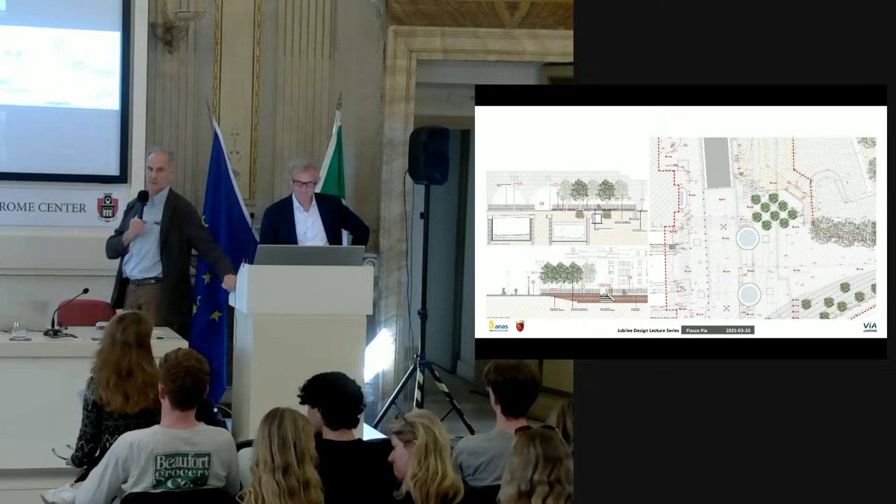That's because it was impossible due to the structures of the Passetto di Borgo. It was not possible to excavate underneath, so we only started once they finished the basements of the Passetto di Borgo. Yeah, it makes sense, I understand.

All right, let me read a few questions. There was somebody asking about the Holy Door of St. Peter's, and whether it in some way affected the design of the square, meaning the entrance to the basilica, whether it had effects on the design.

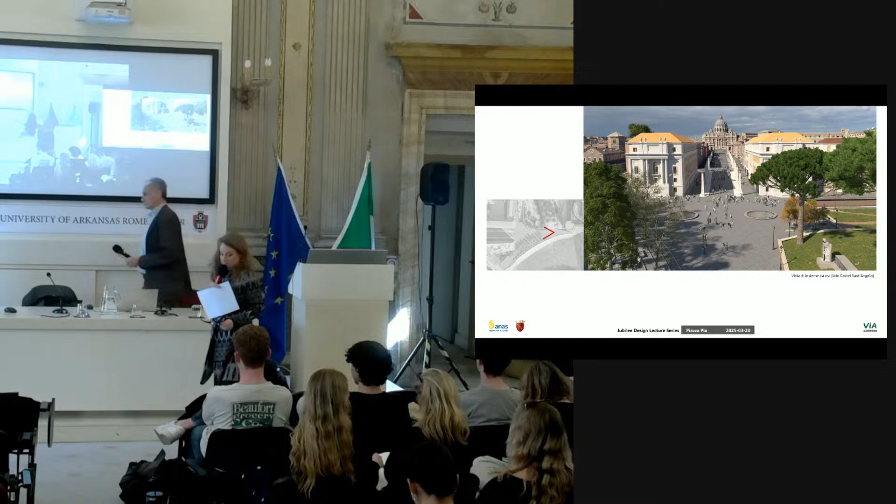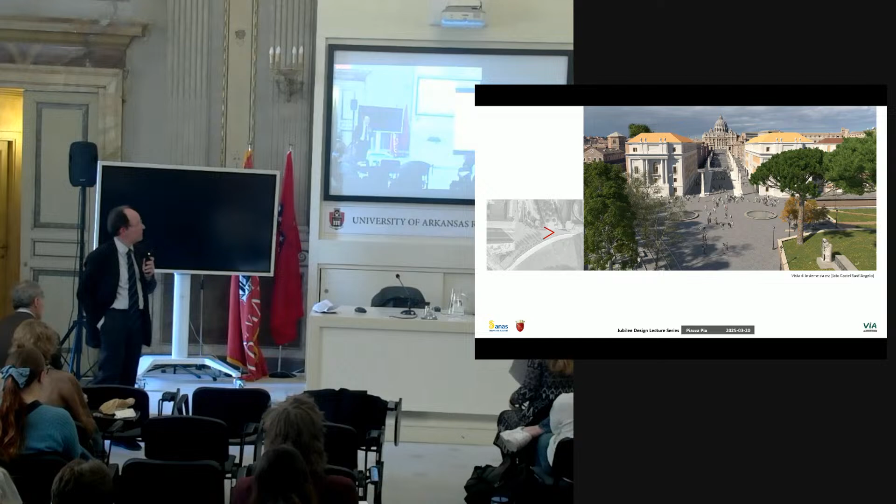Not directly, but on the other hand, it's clear that the whole urban structure is somehow aligned with St. Peter's Basilica. It's such a huge landmark that it for sure conditions the whole design process.

I'll take advantage of this question to add something else. There were quite interesting debates during the design phase with both council authorities and Vatican authorities. At a certain point we were asked to refer more directly to St. Peter's and to Via della Conciliazione. This is a suggestion we tried to resist, since we are not exactly inside Via della Conciliazione and we are relatively far from St. Peter's, about 500-600 meters. There were other stimuli in the area that had to be taken into account, so getting too close to the forms of one part could have created a problem in relation to other elements that also had to be considered.

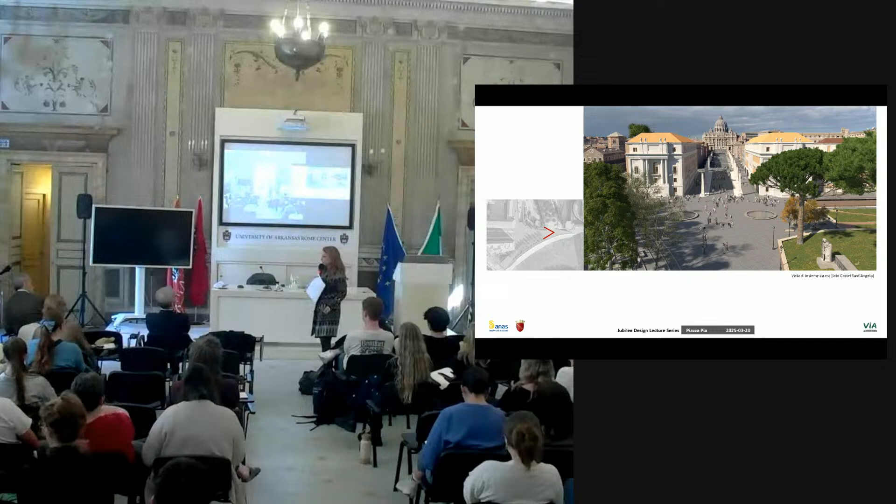Then there was another student interested in what was the most challenging difficulty from the engineering point of view, because this project is a lot about engineering and you mentioned a number of challenges. What was the most important one?

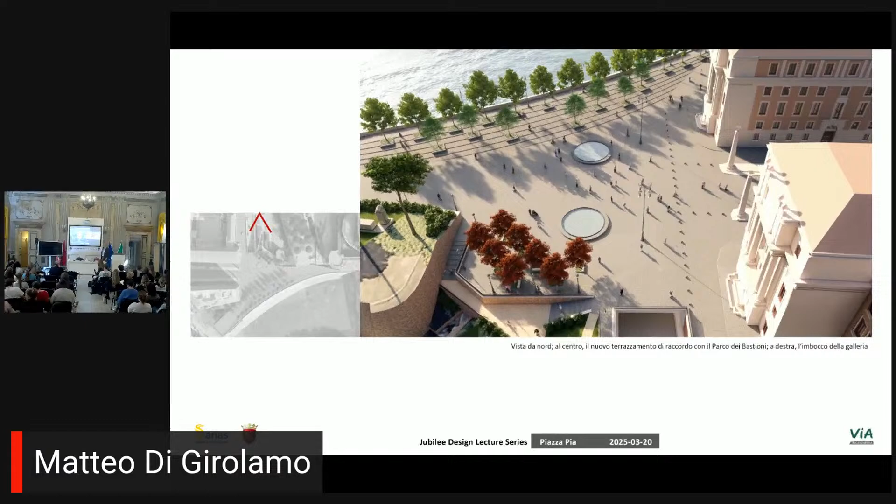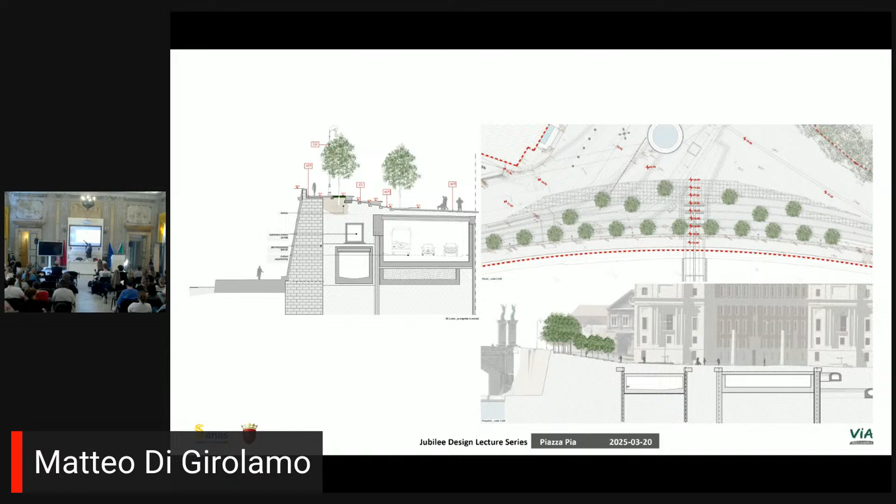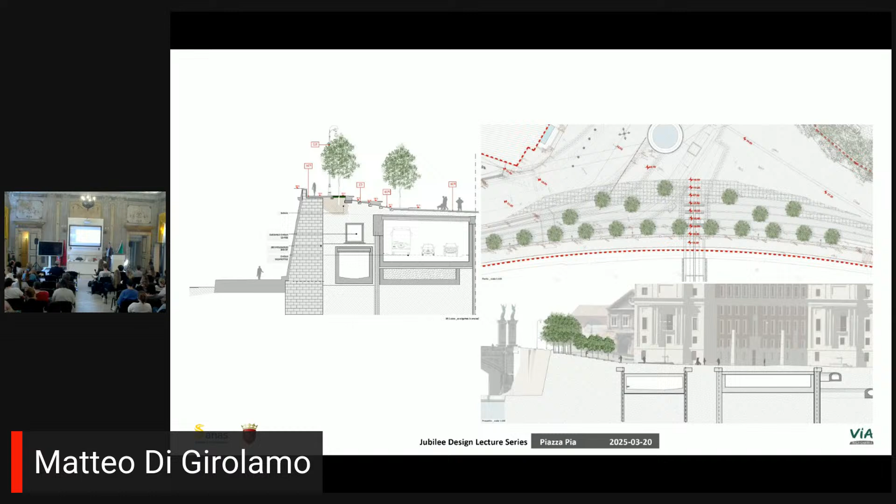As I told you, maybe the most difficult and most important problem was the collectors, but the walls were also a problem for us. We made a hole just under the basement of the wall, because there is also a discharge into the river Tevere, and we needed to pass right there. We had to sustain all the structure to cross it, and also this structure is very close to the buildings. So the problem was to ensure there were no issues at all, no settlements, nothing. This was mainly the main problem we encountered.

How long did the construction site last? One and a half years. Wow, that's magic. In Rome, it's magic, you did a great job. It's considered a record for us. Yes, absolutely, that's why I'm emphasizing it. For our students it's probably kind of normal, but for Rome it's really magic, a miracle.

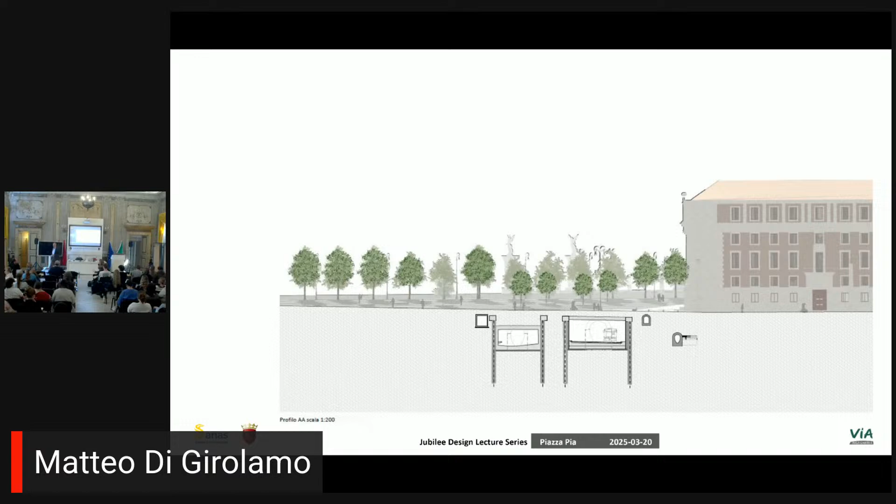Not the external design though. The external design took longer, because many actors had to be involved.

Then there is a question about the architectural design. Somebody was asking if you looked at other projects developed elsewhere to get inspiration for this one. If the answer is no, that's fine too.

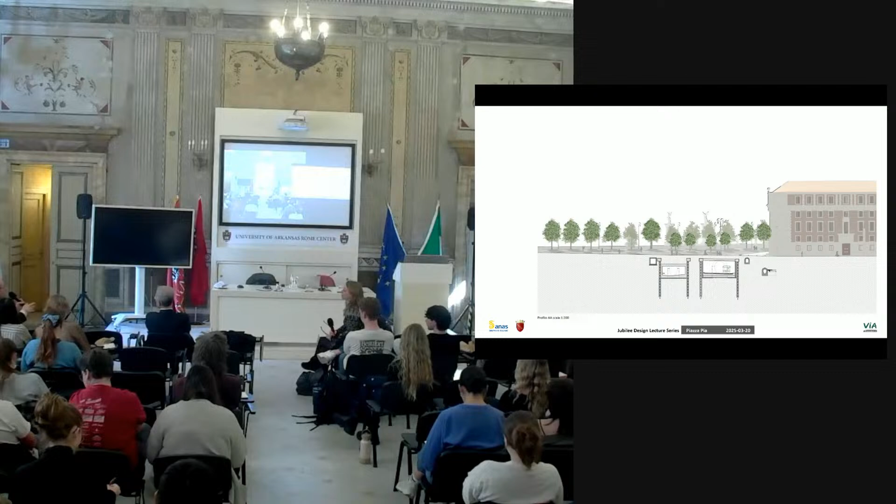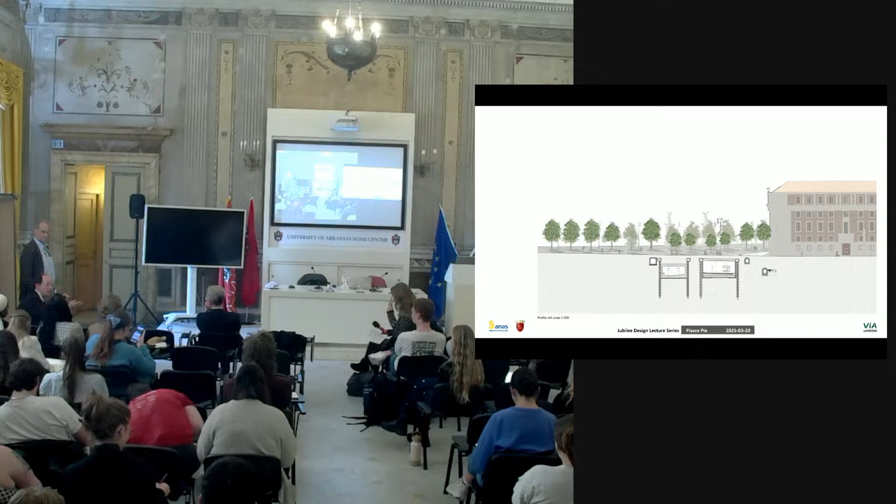Well, it's an interesting question, related to what I was saying before. It's not that we are not interested in other people's projects, we are very much interested, and in my opinion, when I see other people's projects, I often like them more than my own. But in this particular case, we established very rigid lines within which we wanted to work, and therefore we looked not so much to other design experiences, but rather to the existing urban forms of the city.

I have to say something else too. In working on the urban design, we collaborated with Professor Francesco Cellini, who has been Dean of the Faculty of Architecture of Roma III, one of Rome's architecture faculties. We engaged him as an expert, a quite interesting person, and he is currently working on the new piazza underneath the Augustus Mausoleum on the other side of the river. That was certainly an experience relevant to considering changing levels and how to deal with slopes and similar issues. So those were our references, but I cannot say we had any particular reference in contemporary architecture.